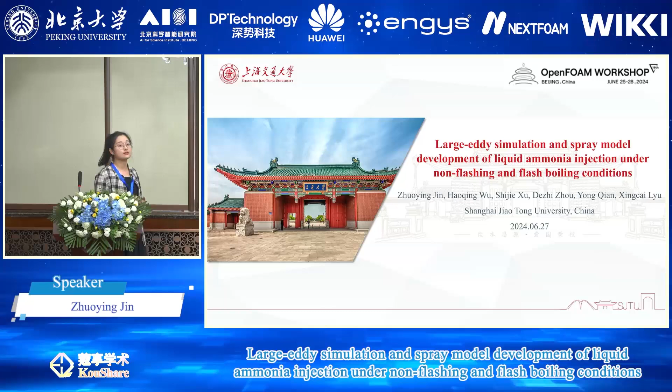Today I'm pleased to share my recent work in the 19th OpenFOAM workshop. My presentation topic is large eddy simulation and spray model development of liquid ammonia injection under non-flashing and flashing boiling conditions. My presentation includes 4 parts. The first part is the background.

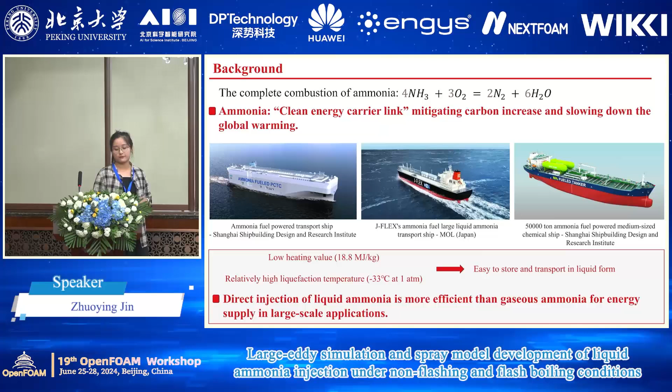Due to the carbon dioxide absence in complete combustion, ammonia has gained global attention and is regarded as a clean energy carrier, which can mitigate the carbon increase and slow down global warming. It has a relatively low heating value and high liquefaction temperature. Therefore, the storage of ammonia in liquid form is easier, and direct injection of liquid ammonia is more efficient than gaseous ammonia for energy supply in large-scale applications.

However, the special thermophysical properties of liquid ammonia, such as high saturation vapor pressure and latent heat, introduce the flashing boiling phenomenon and significant cooling effects. Flashing boiling means that the local pressure drops until it is lower than the saturated vapor pressure of the liquid. As shown in these 2 figures, ammonia is more prone to enter the superheated region than other traditional fossil fuels.

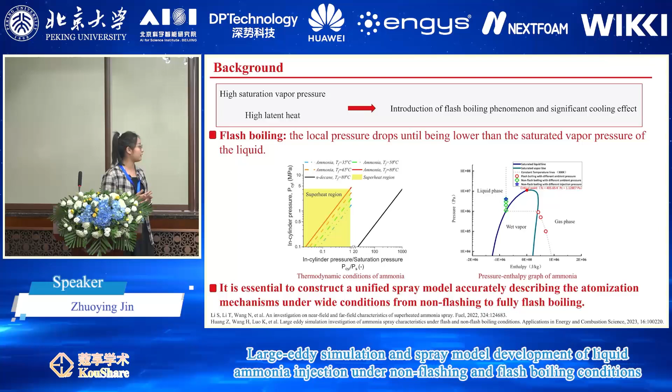Therefore, it is essential to construct a unified spray model accurately describing the atomization mechanisms under wide conditions from non-flashing to fully flashing boiling. This is also the aim of this study. The next part is about the model construction and computational details. The key parameter Rp, the superheat degree, is first defined, which is the ratio of the ambient pressure to the saturation vapor pressure under the liquid temperature. Conditions with Rp 1.5, 1, 0.5, 0.3, and 0.1 are included in this study.

Due to the wide thermodynamic conditions involved, the atomization mechanism analysis is first conducted in this study. As shown in these figures, for different Rp, the spray breakup is controlled by different atomization mechanisms. Under mechanical breakup, the spray breakup is mainly controlled by aerodynamic breakup. For external flashing, flashing boiling happens, and bubble nucleation, growth and explosion happen inside the jet.

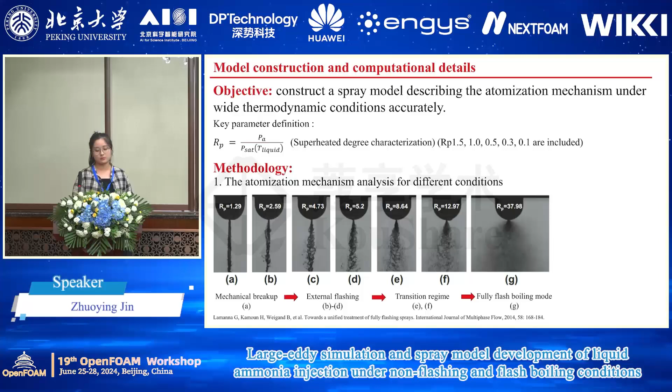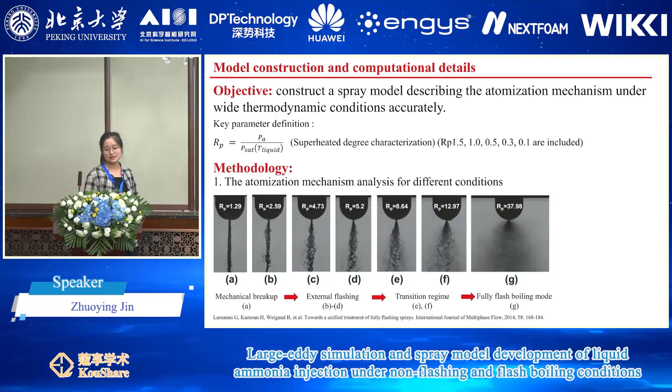For the transition and fully flashing boiling modes, the effects of the nozzle flow should be considered, and especially for the fully flashing boiling mode, the spray breakup is dominated by the nozzle flow. The states involved in this study are then recognized using different transition criteria and experimental results. The first criterion is based on the nucleation energy barrier, and through the calculation, the condition with Rp 0.1 is located in the transition region, which needs to consider the in-nozzle flow effect.

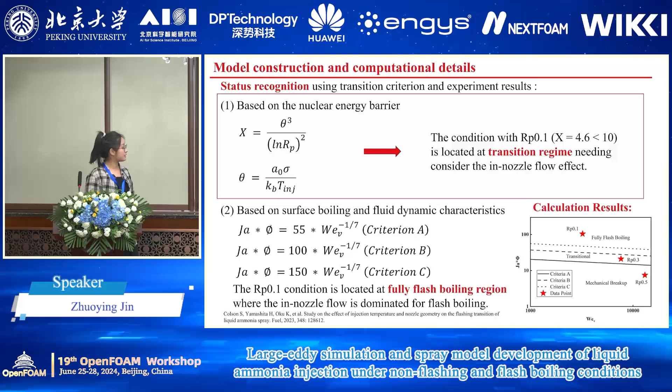The second criterion is based on the surface boiling and fluid dynamic characteristics through the calculation of the Jakob and Weber numbers. The calculation result shown in this figure gives similar results to the first criterion. With the third criterion, based just on Rp, we can also conclude that the condition with Rp 0.1 shows a significant effect of the nozzle flow. The final one is based on the experimental results.

As shown in this backlight image from the experiment, we can conclude that for the conditions with Rp 0.5 and 0.3, bubble growth and explosion work. Under the condition with Rp 0.1, the spray width and expansion rate increase significantly, which means that this condition is located in the transition and fully flashing boiling area, needing to consider nozzle flow.

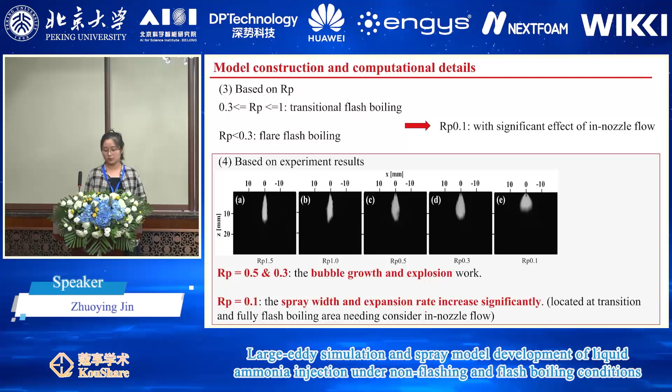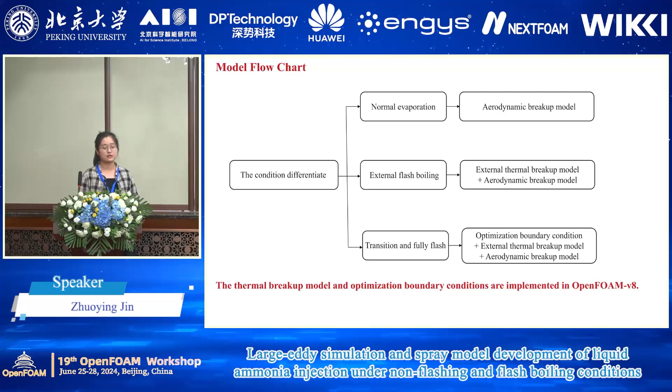Therefore, based on the above atomization mechanisms, we can conclude that for different thermodynamic conditions, different spray breakup modes should be used. In this study, in the normal evaporation region, the aerodynamic breakup model is used. For the external flashing boiling region, the thermal breakup model is added. Finally, for the transition and fully flashing region, the boundary conditions including the initial droplet size, velocity, and spray angle are further optimized, wherein the thermal breakup model and the optimized boundary conditions are implemented in OpenFOAM version 8.

The next part is about the model construction and computational details. The spray model development and the large eddy simulations of liquid ammonia injection are conducted in OpenFOAM version 8 based on the Euler-Lagrange scheme.

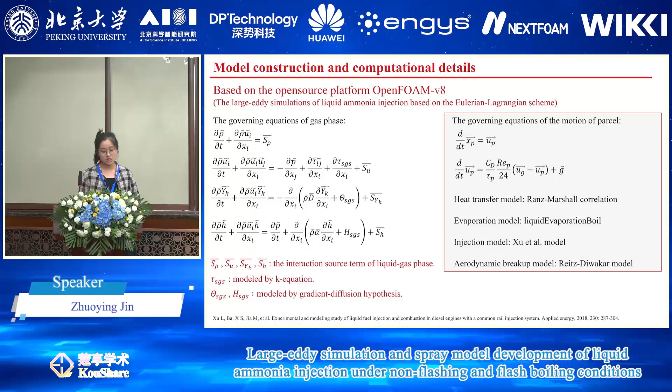And then the governing equations of liquid phase and some sub-spray models are shown in the right part, and it is worth noting that the Reitz-Diwakar model is used as the aerodynamic breakup model in this study. And for the computational mesh, in order to resolve the sufficient turbulence kinetic energy and simultaneously ensure the computational efficiency, the 0.125 mm mesh size is for the liquid core region, while the 0.25 mm is for the spray region.

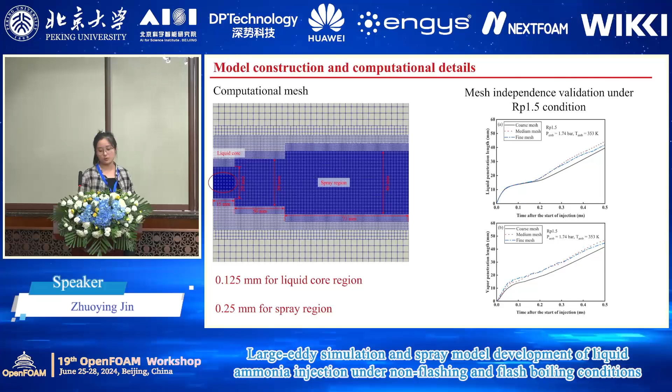And the mesh independence validation is conducted under the RP 1.5 conditions. And as shown in this figure, it can be seen that the present mesh, medium mesh, can give the proper prediction results. And then is the introduction about the external thermal breakup model and optimization boundary conditions. First is the thermal breakup model.

In this model, the process of bubble nucleation, growth, and exploding are modeled. The critical bubble radius is used as the initial bubble radius, and the RP equation is used for the bubble growth. And then based on the instability analysis and the mass conservation, the breakup criterion and SMR of child droplets are obtained. In this model, it assumes that the breakup happens when the thickness of liquid film is equal to the instability amplitude. And due to the bubble growth, the velocity increase of child droplets is also considered.

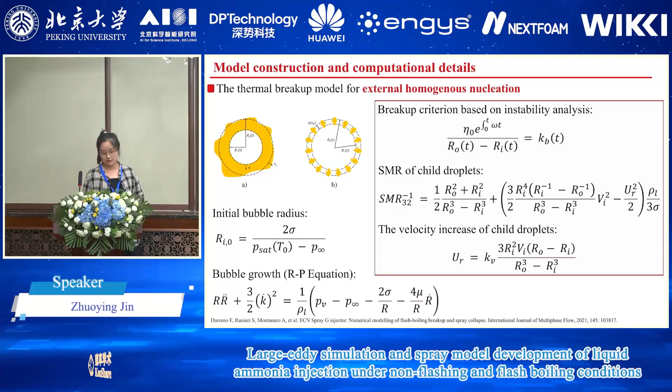And then is the effective nozzle model for the initial size distributions, which quantifies the heterogeneous nucleation in nozzle through a zero-dimensional model. And as shown in this figure, through the calculation of bubble departure diameter and frequency, the volume of the vapor in the nozzle exit can be obtained. And in this study, the normalized droplet diameter reduction factor is used.

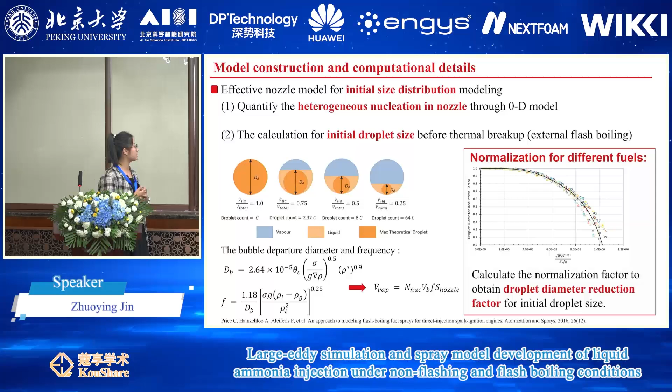And then for the spray angle correlation. In the experiment, it can be seen that due to the bubble breakup in the near field and the faster evaporation of small droplets in far field, the spray angle shows an increase first and then decrease trend, which shows the leaf plume shape. Therefore, the time-varying spray angle correlation is also used in this model.

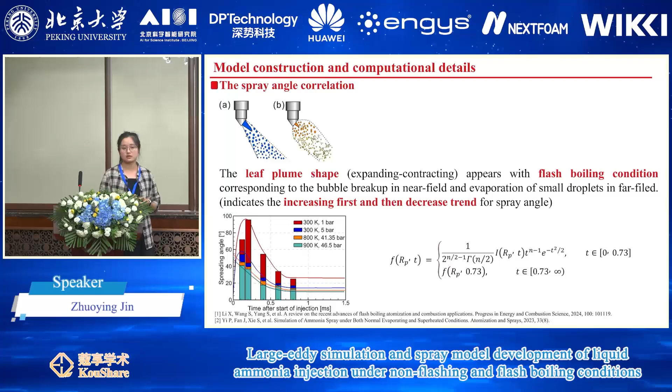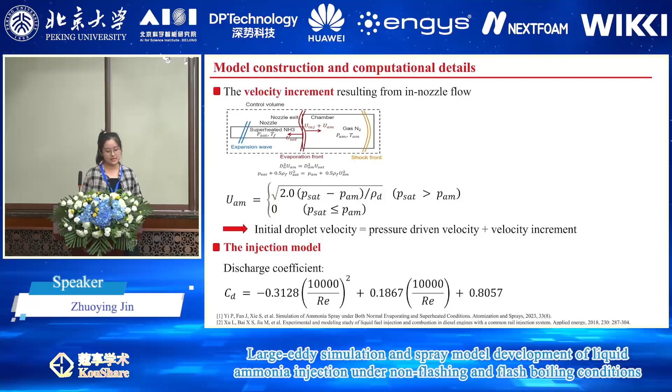Besides, due to the superheated in-nozzle flow, the velocity increment is also considered in this study. And in this study, the initial droplet velocity is the sum of the pressure driven velocity and the velocity increment. And the discharge coefficient is based on the Reynolds number.

And the third part is about the model comparison and evaluation results. The first is under the normal evaporation region with RP 1.5 and 1 condition. And as shown in these two figures, the present model, considering the aerodynamic breakup model, can give the proper prediction results for the spray penetration and morphology.

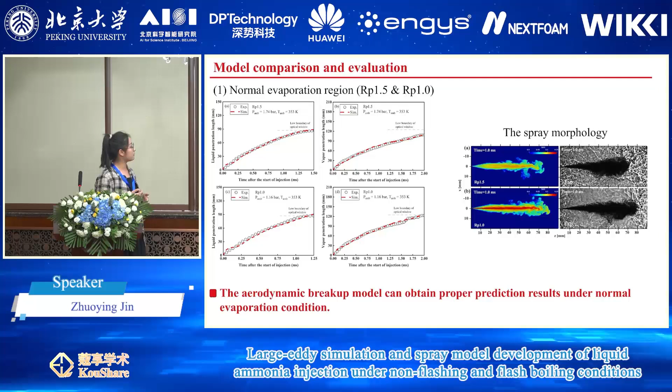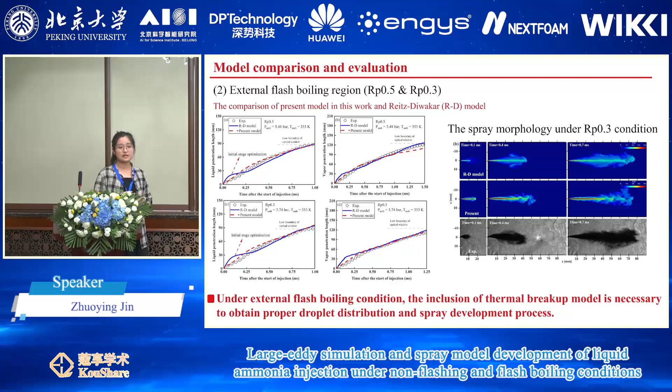And the second result is for the external flash boiling region under the RP 0.5 and 0.3 conditions. The present model and traditional Reitz-Diwakar model are compared in this part. And it also can be seen the present model, considering the external thermal breakup model, can give the better prediction results for the spray penetration and morphology, which mainly results from the initial droplet size distribution.

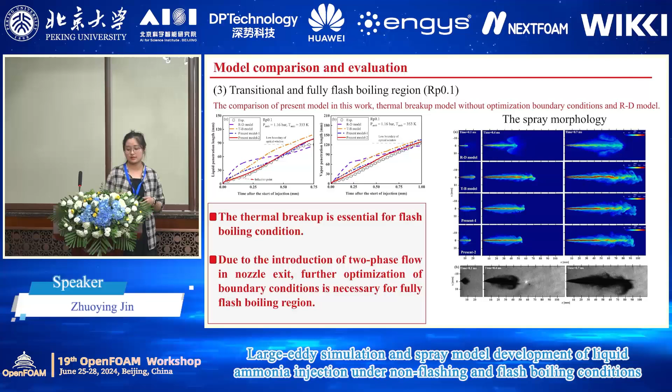And the final part is the conclusion. First, the high saturation vapor pressure of liquid ammonia introduces wide thermodynamic conditions from normal evaporation to fully flash boiling in practical applications. Second, the atomization mechanisms analysis for different conditions is beneficial for the construction of a unified spray model.

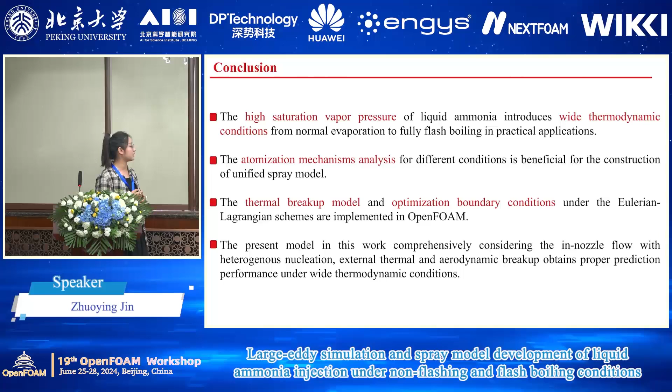Third, the thermal breakup model and optimization boundary conditions under the Euler-Lagrange scheme are implemented in OpenFOAM version 8. Finally, the present model in this work, comprehensively considering the in-nozzle flow with heterogeneous nucleation, external thermal and aerodynamic breakup model, obtains proper prediction performance under wide thermodynamic conditions. And that's all.